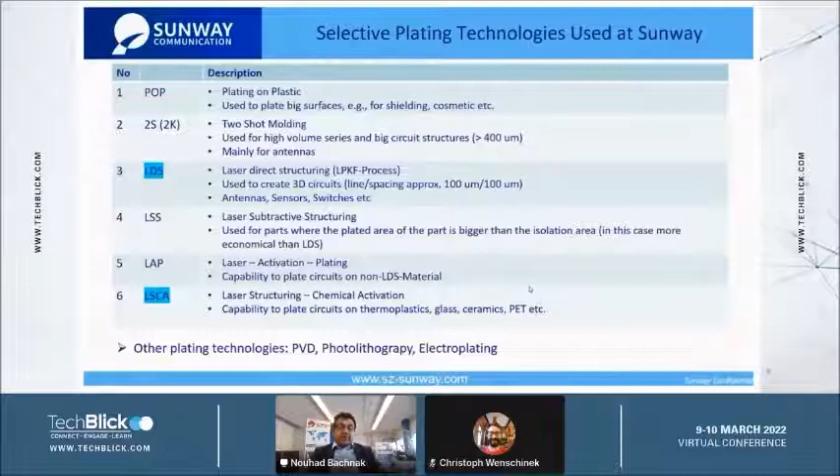For the LDS material, you need an additive. This additive is based on a copper complex, and with the laser actually adding heat to the plastic, you make it rough. You structure the plastic part, and you activate this metal complex inside. So with LAP, you don't need this additive inside, but you always need activation to be able to put metal, or actually copper, on the plastic. So you need an activation. This is normally based on palladium.

The second process is similar to LAP, but here we use another chemical. It's not palladium, in order to activate the plastic. And I will explain it a little bit more later. And there are other plating technologies like PVD or photolithography or electroplating.

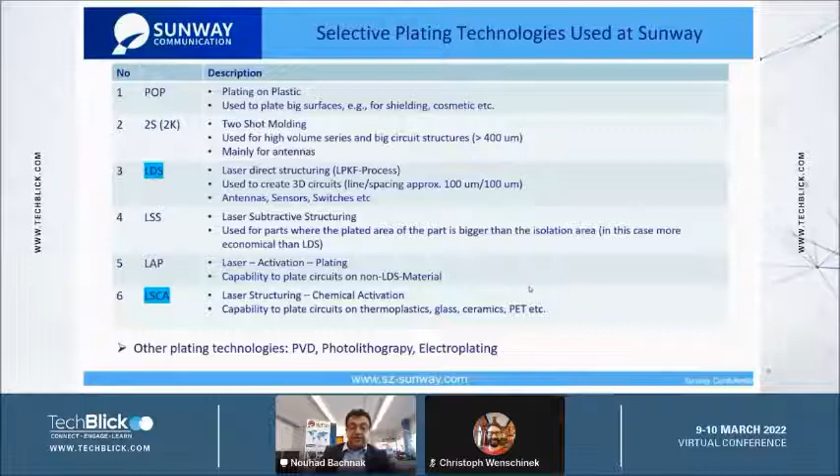Here I'm explaining the LSCA process. LSCA stands for laser structuring chemical activation. This is a new process where we don't need this additive inside of the material. So the LDS process is the most used process now. We do about 80 to 90% of the projects in 3D MID with this process. But here you need this additive inside.

Let's say if you need a transparent material and you add this additive, this will not be transparent anymore. Or if you have a biocompatible material and you add this additive in order to be able to structure and plate it, this will not be biocompatible anymore. So we started to look for solutions where we can use a broader range of materials, because we can't add this LDS additive to every material.

At the beginning, actually, we achieved good results with a process where we used the same setup of laser parameters we used for the LDS, but this works only for a small variety of materials. And we have worked with other partners, where we now have a very broad variety of substrates. We can plate on plastic, on glass, on ceramic, on thermoplastic, and so on.

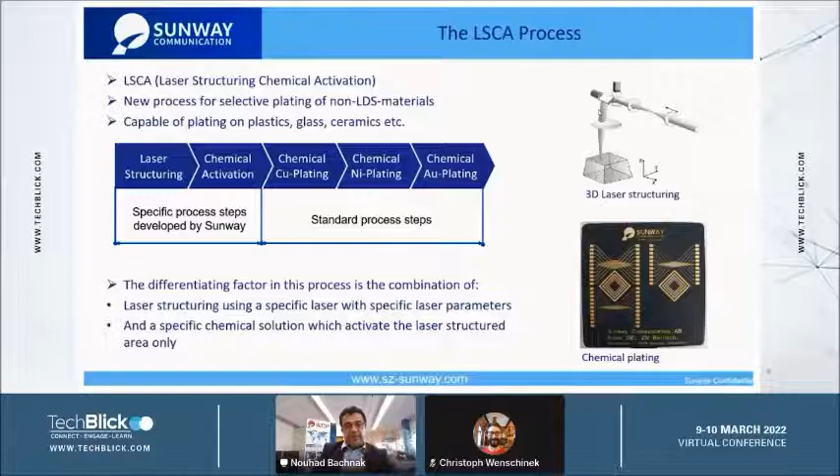Now we have compared, not with all the processes, but the main known processes, LDS, LAP. PVD actually is not a 3D process, but we have seen that we can use this process also for flat substrates. Therefore, we put PVD here for comparison. As you can see, if you compare the LSCA process to LDS and LAP, it's superior in terms of plating on more substrates. If you compare this process with PVD, you can plate on a high variety of substrates, but you can't do 3D shapes, and the production costs are high.

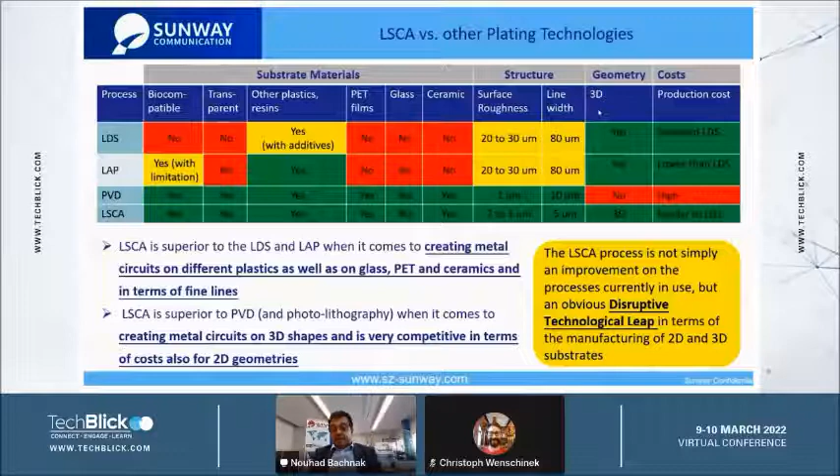So comparing this process with many other processes, I would say that it's not just an improvement, it's really a disruptive technological leap, because in terms of line spacing, we go down from 100 to 200 micrometer, or here I write 80 micrometer in the standard LDS process, the standard MID, down to 5 micron. In terms of 3D, if we compare that with PVD, this is really full 3D. And in terms of cost also, it's a very easy process, just laser structuring without adding anything, activation and plating.

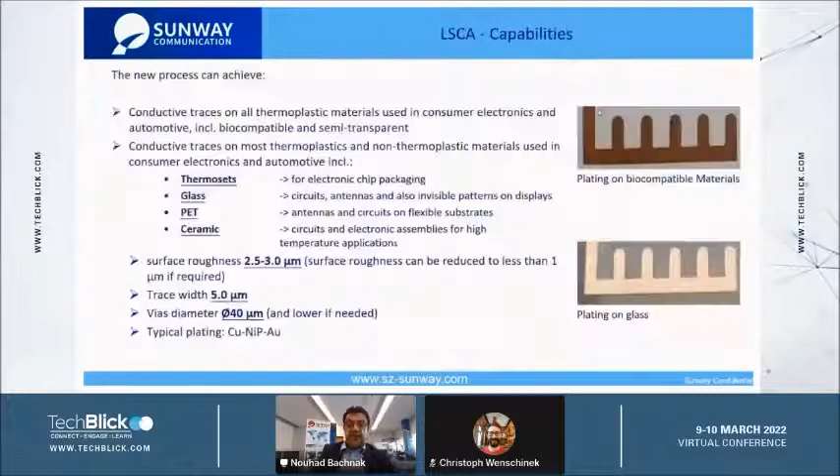Here are the capabilities I have mentioned already. We can structure nearly every material. I have presented here thermoset, glass, PET, and ceramics, some examples where we can use it. And additionally, the surface roughness is very low. This is good, for example, for antennas. And the width of the traces can go down to 5 micron.

This is very interesting. The 5 microns, maybe you don't need it if you create a circuit, but if you want to create an invisible circuit or invisible lines, the normal eye can see everything higher than maybe 10 micron, so even if you can see very well, lower than 5 micron, you can't see it anymore. So you can create invisible circuits also. The diameter is proven for 40 micron, but it can be done for lower than 40 micron.

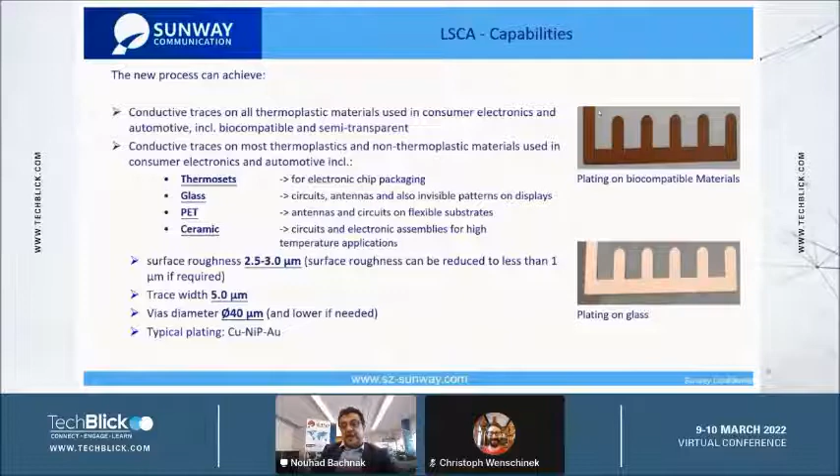And the typical plating is copper, nickel, gold. Actually, we have to start with the copper layer. Nickel, gold, this can also be something else, let's say tin or silver, but the standard plating is copper, nickel, gold. Here on the right side, two pictures. This is plating on biocompatible materials without any additive inside, and the other one is plating on glass.

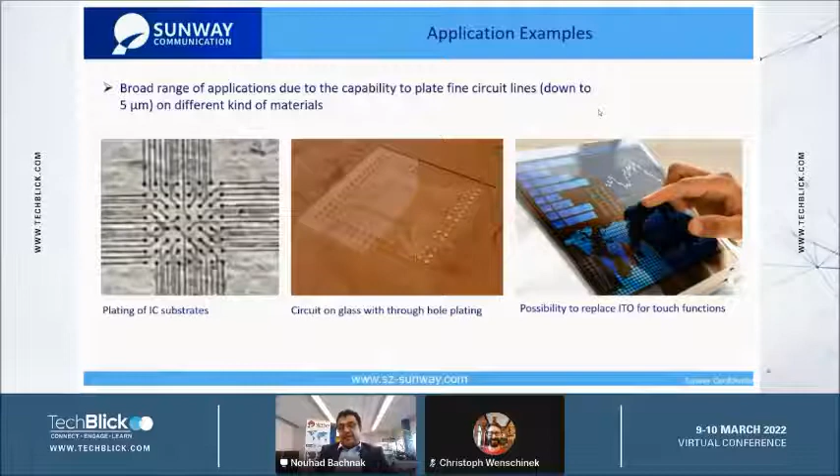I have mentioned below 5 micron, the normal eye can't see the structure anymore. Here for all touch screens, you need a conductive layer. Normally it's ITO, indium tin oxide. If we structure, let's say, a grid of copper, we will achieve the same function without you being able to see it. There is a grid, but you can't see it, and you have the touch screen function.

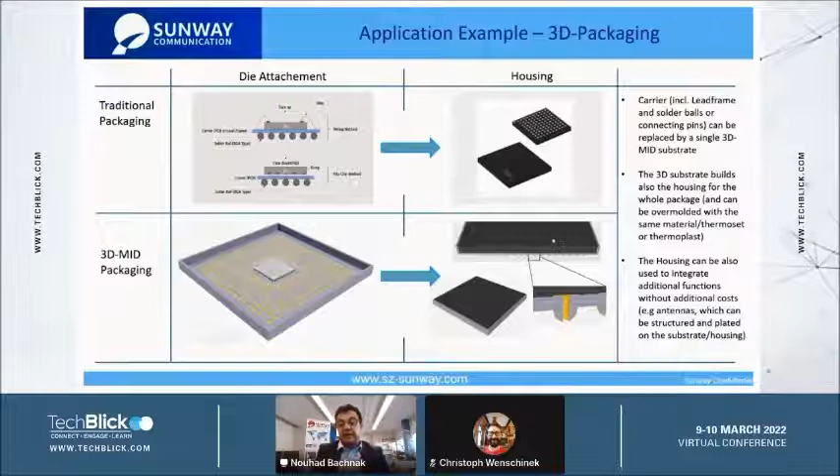So this can be done with bonding, wire bonding, or with the flip chip, the same technology like PCB. But here we have the whole housing, the whole connection, whether pins or balls, in one part, and this housing serves as, let's say, yeah, you have to overmold it, and it's done. So at the end, the most important one: everything which is not reliable for mass production or can't withstand environmental tests is fine, you do something in the laboratory, but you can't use it.

Here we have developed a plating process. So you have the structure, you have the activation, now you plate. And normally you use different substrates: glass, plastic, ceramics, whatever. And on top you have copper, nickel, gold. And substrates which expand very fast due to temperature or due to humidity will expand faster than the plating. And then we will have cracks or delamination of the parts.

We faced such issues, I would say, 6 years ago, and we have developed a specific plating process for plastic materials where we can withstand all the tests, automotive tests, with more than 1,000 hours, especially the humidity and the temperature test. For industrial consumer goods, the requirement was 90 relative humidity at 65 degrees, 72 hours.

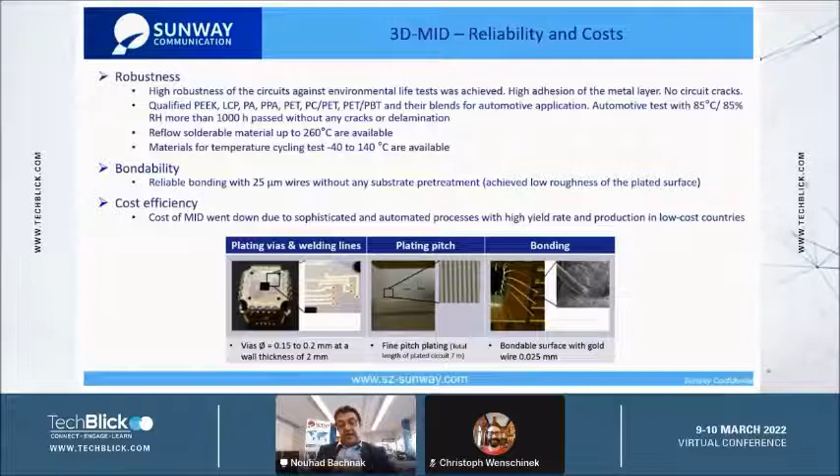The second one is a part where we have more than 7 meter long lines or structure with a very fine pitch. It's three-dimensional. The material is PA. It absorbs a lot of humidity, without any cracks. And the third one is to show the bonding capabilities. So this is my presentation.